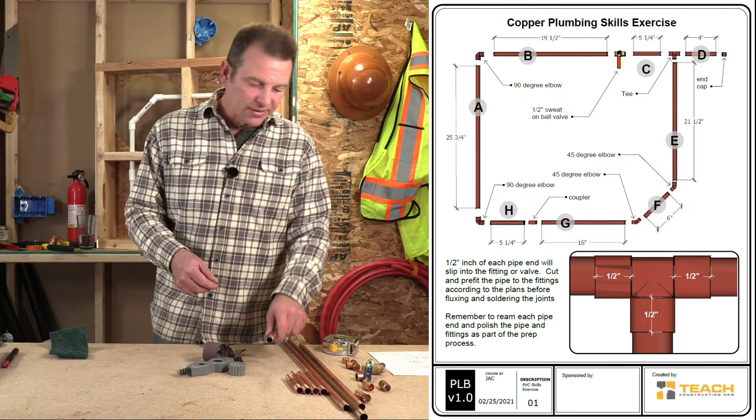So let's go through this skills exercise. I've got my plans here, and I've got the parts called out with a letter of the alphabet and then a dimension. So part A on your plans, we'll put that set of plans up so you can see it, is 25 3/4 inches. I pre-cut my parts here. This is part A, and we're going to assemble this. I'm not fluxing it at this point. We're not sweating it. We'll have that conversation when I get done. We're just going to pre-assemble it. This is a dry fit to make sure everything works together.

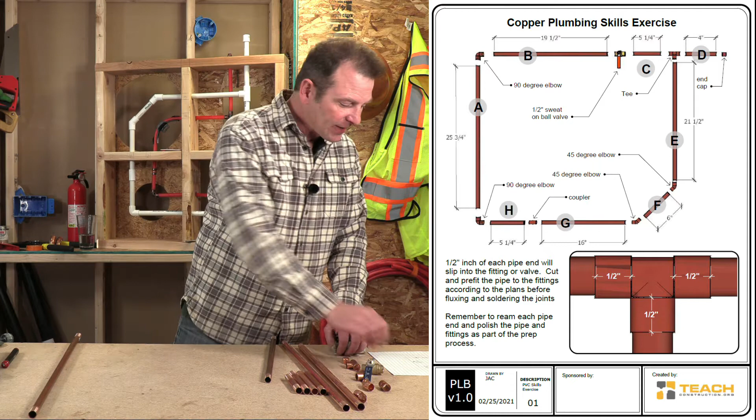So then I have an elbow here, a 90-degree elbow. And then I'll have part B, which is 19.5 inches. That would be this part here. And that piece goes right in like that. At this point, we have a valve to put on here. And I want my valve with the handle turned off. If it's turned on, it would be straight. So that goes on this end here. If you notice, this valve is brass, and during the sweating process, the solder will stick to the brass and the copper, so it is compatible with both those materials.

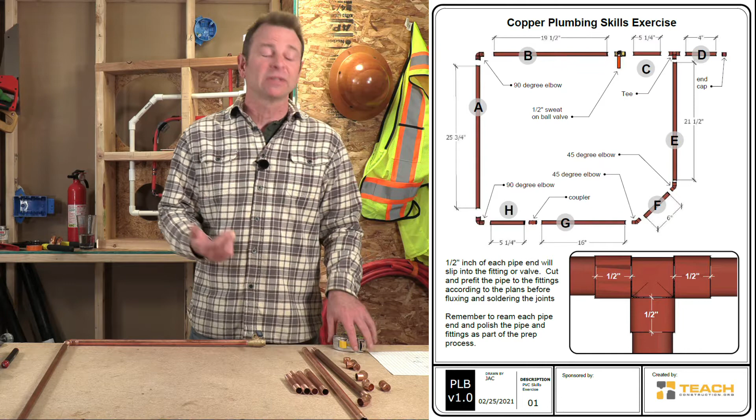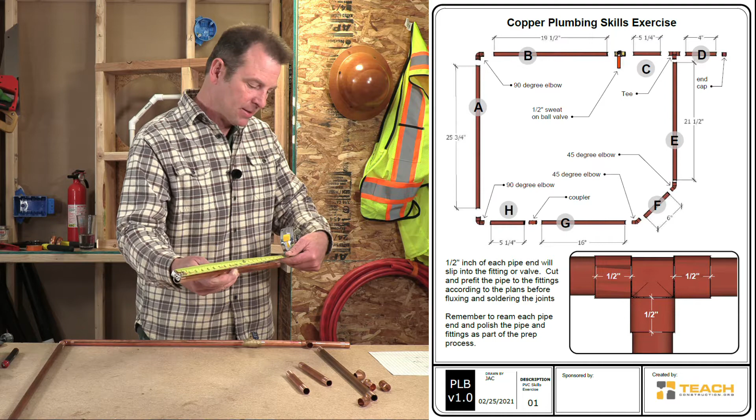Our next piece, part C, is 5 1/4 inches. It's one of my short pieces here. And there's my 5 1/4. That piece goes here. I then have a T that comes off here, facing in that direction. I'll have a small leg that comes off the end here. This is my 4-inch piece. Let me double check. 4-inch. And I also have an end cap that goes on the end of there. Working this direction, that would be part E, and it's 21.5 inches. I'm thinking that's this piece, 21.5. And that part goes here.

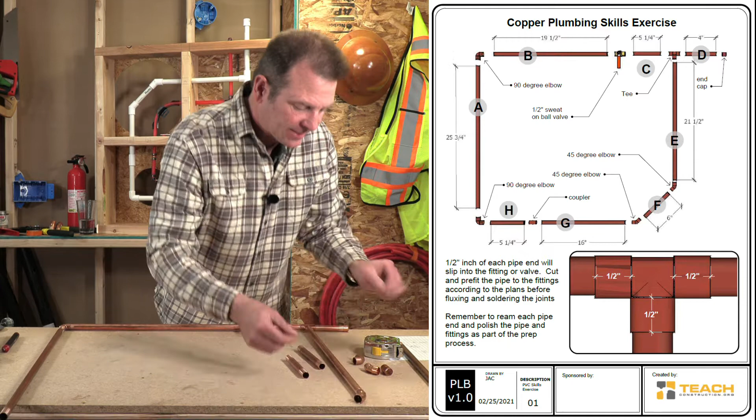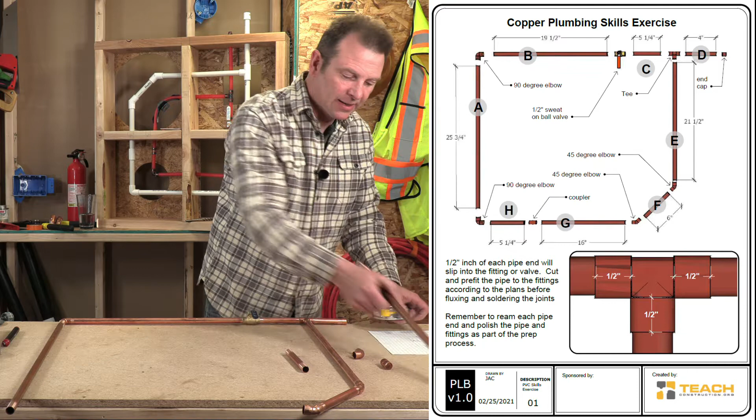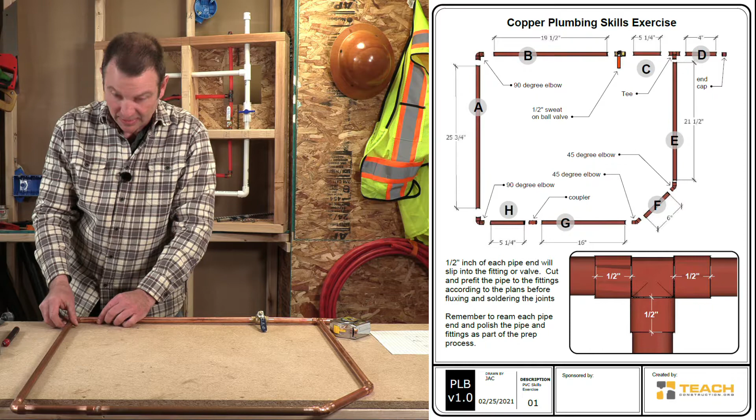Then we have our 45 turns here. I've got a 45 plus a 6-inch piece for part F. And that would be this piece. And I'll go ahead and put my 45 on the other end. There's two 45s. That goes there. And then I have my last section here that would be 16 inches. Let's double check. 16. And then I have a coupler that goes on the end of that, and then my last piece goes here with an elbow here. And because this is sticking off of the table, I'm going to assemble this all at the same time. So that is the entire thing in one circuit. We can double check our measurements based on the measurement that's called out on the plans.

This will fit into about a 27-inch square. So we can check for parallel on one side and the other, and for this side. I've got 27 here and 27 here, and I also have 27 there and there. So we have made a square circuit with a corner cut out of it, with a valve in place and a T-joint with a short stub off of this end. At this point, we need to solder this all together, or it might be that you do this skills exercise and you only get to this point of the dry fitting.

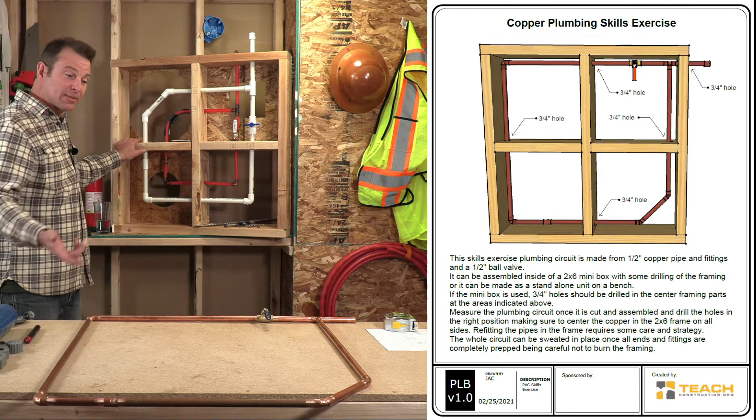Sometimes when we do this skills exercise, we'll do it in a frame like this. And this particular assembly fits in this frame. So you drill the holes in the frame and it can be assembled in here. That's good for holding the piece in place when you're sweating it. It's much more realistic as far as how you would sweat joints in framing. This offers you some support. That's your third hand that I was using during the first part of this lesson. And that makes all of this happen and become a sealed system of copper pipe.

So that's it for our skills exercise. As you can see, you need a fairly large table to assemble this circuit. I dropped a piece while I was moving it from there to here, but hopefully you get the idea. This is how copper goes. This gives you a lot of practice with different joints, different fittings, different process of prepping the pipe and actually reading plans, right? We had a set of plans and we created this from those instructions. So I hope all that makes sense.